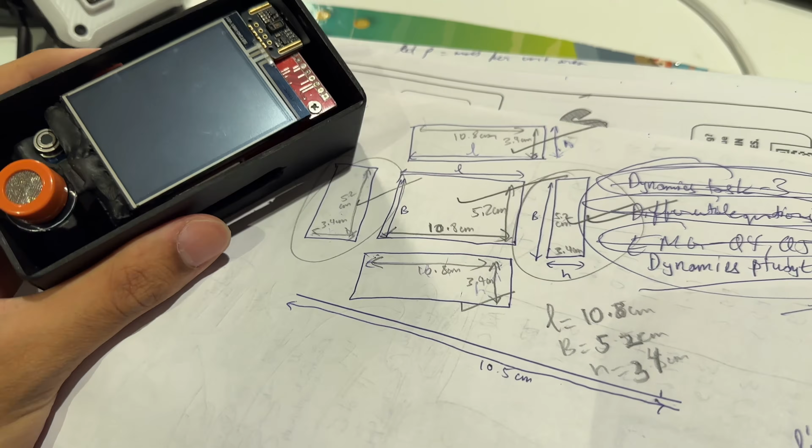In order to carry this out, I took into account how many sides I wanted to cover. I wanted the sides and the bottom side to be covered, so that's why it was 5 sides, 5 faces. Maybe sides is the wrong word, but you'll need 5 faces for your case, and that's how it will actually look.

Then you're probably going to mark up all the measurements, and then we'll move ahead with SolidWorks.

Obviously you're gonna need SolidWorks or any CAD software for designing your case, or any open source software. In my case, I'm using SolidWorks because it's free for me, given by the college. We're gonna go to the parts, and it's quite similar for most CAD softwares to design something, but let me just show you how I actually did it.

It's just basic sketching, and you'll probably go here. Now I'm going to fast forward the video a little bit, but I'll explain it in the middle, so just watch it.

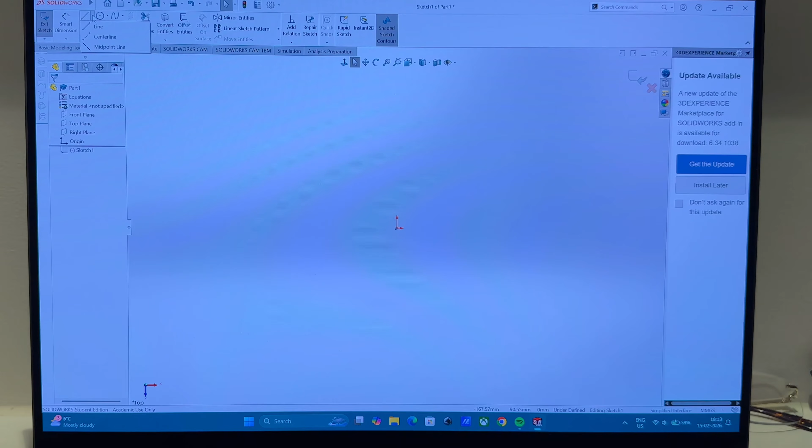First we'll start by actually making some shape. In my case, I made a rectangular shape, and this is how it turned out to be. We need to close the shape first, and then we're going to make the measurements pretty much clear.

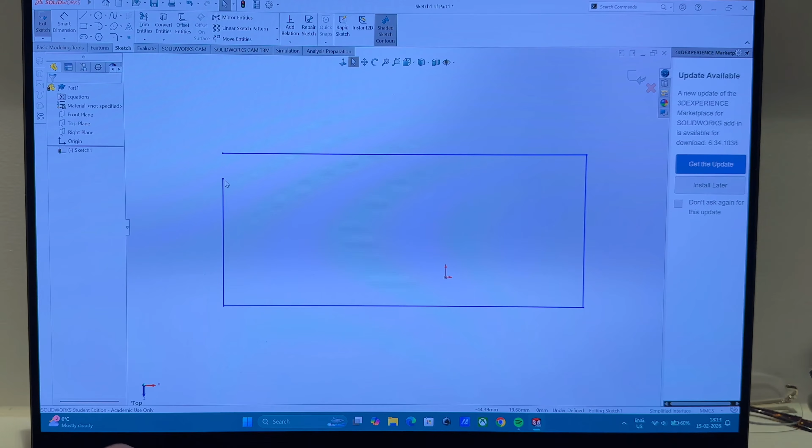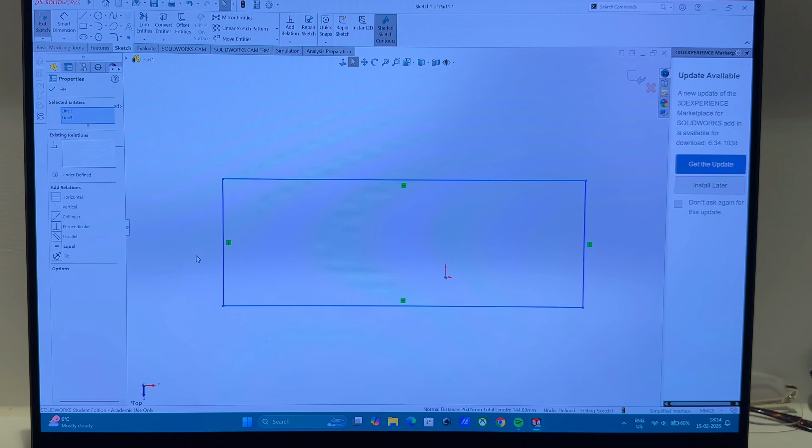So in order to actually design the case, there are many things that you need to learn in between. We need to add constraints to our shape so that it is actually going to close, and then we're going to do this, and this, and then it's kind of fixed.

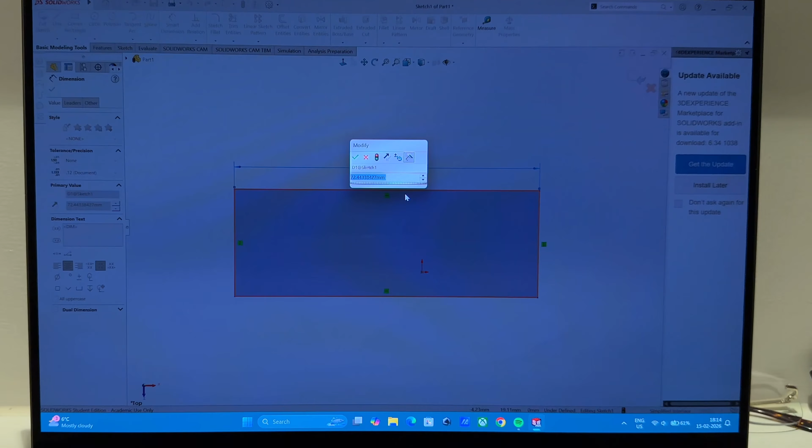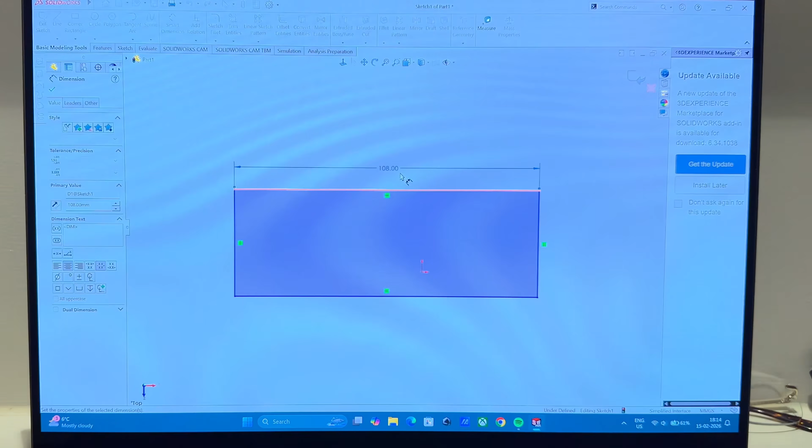So in order to get the right dimensions, we need to go on Smart Dimension, and this will ask you what is the length of the side that you actually need. In my case I needed 10.8 centimeters, which is 108 in millimeters. So this is 108, and then this is going to be 52, because I needed 5.2 centimeters.

This is the basic of what we are actually going to need, and then it's going to get a little complex, but you'll probably get it. You need a center line.

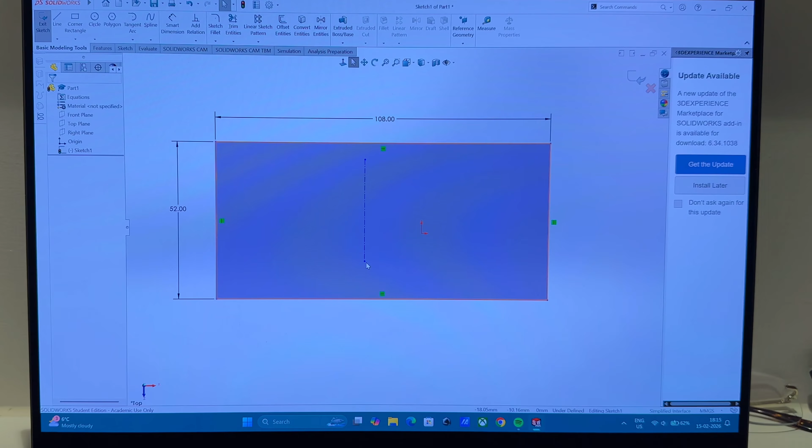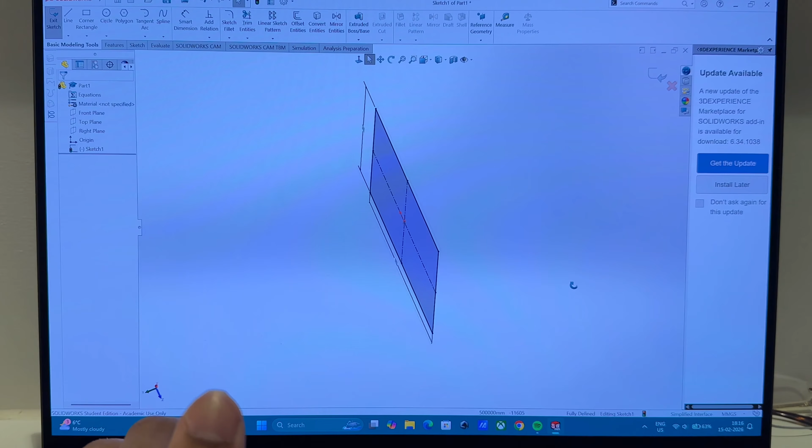Okay, so we are done with this part, making the bottom side or bottom face of the case, and this is how it actually looks. You are done with the first one, and you need to make 4 of it just like this. We are just going to do the final step, which is making it a layer.

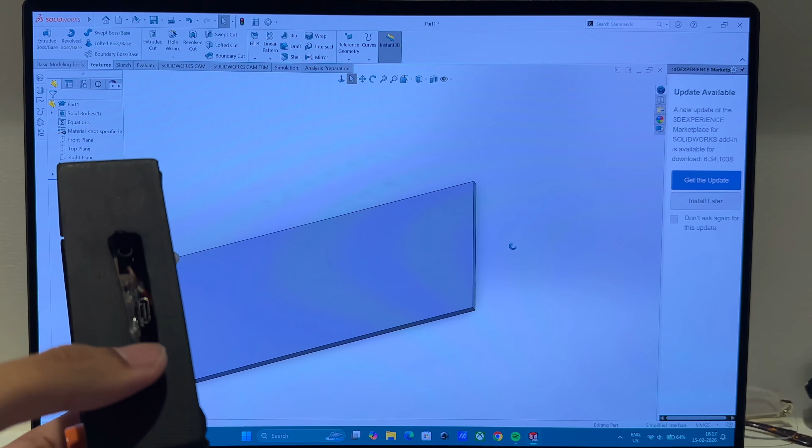Okay, so we got the first one, and it turns out to be the same as this one at the bottom. I have just carved a hole for the button, and you are going to actually 3D print it, and then we are done with the first one.

Make sure that your sketch should be actually fully defined. If it's not fully defined, it will probably show at the bottom, and if it's not fully defined, then you won't be able to print.

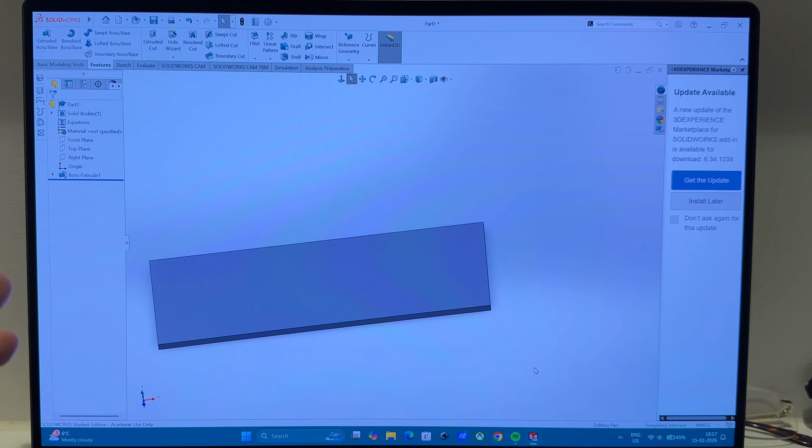Now for actually making this file into STL, that is the 3D printer file which we're gonna need for 3D printing it, we have to go here and save it, and just go through this and look for STL file, and save this as part 1 tutorial.

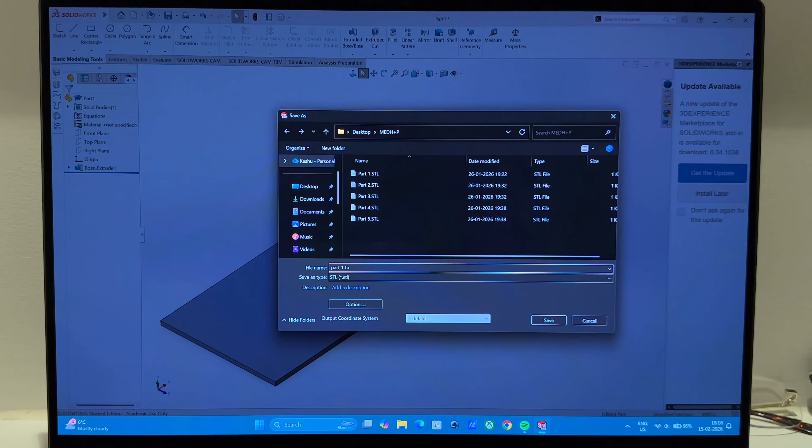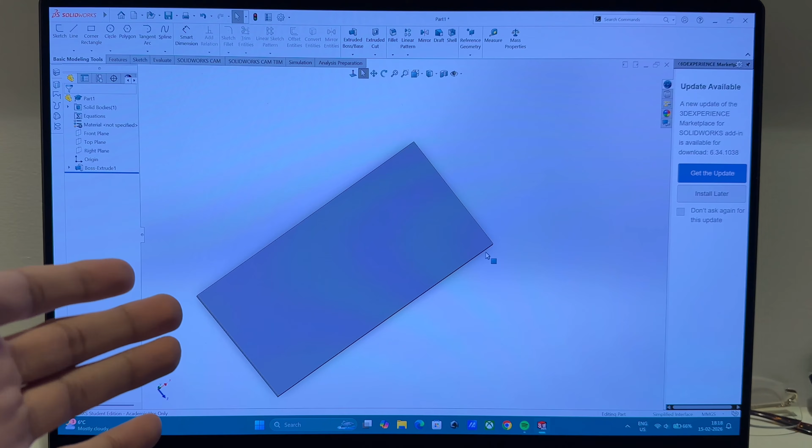Okay, so it's done, that's it. And now you're probably going to need the other 4 sides of the same thing we have done here. It's not a different thing, just make sure the dimensions are proper, and you just do the same process that I did.

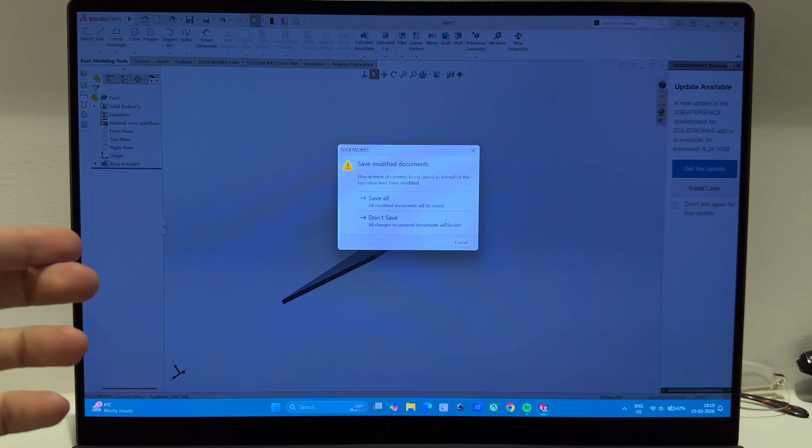Now we're probably going to close Solidworks. Okay, so now our Solidworks part is over, and congratulations, you made yourself a casing for it. And now let's make it real life. So we'll go to the 3D printing part now.

So we are done with designing the first part, and you'll probably going to need 4 of the parts just like this, and you'll be done with designing the first thing, which is doing the Solidworks job. Now our next thing is to go with the 3D printing.

Now we have the basic STL file, which is the file needed for 3D printing, and now we're probably going to need a 3D printer. Obviously I used my university's 3D printer. I don't have one, I don't have that much money right now to buy a 3D printer, but according to your use, you can use any 3D printer which is available. There are many 3D printers available for rent too, which can do your job.

But if you already have a 3D printer, you can convert the STL file to whatever file is needed for your 3D printer. At my home I had a 3D printer which was using G-code file, so I transferred my STL file to G-code file and then 3D printed that. So for my university, I just sent them the STL file and they printed it out.

So now I'm going to show you the next step, which is actually making the plate of the 3D printer and how it turns out to be on the 3D printer's plate.

For this, I'm using a reference of Anycubic slicer, which is again an open source software, but I had this software for my 3D printer which is at my home. I'm obviously not having that 3D printer right now here in the UK, but because I'm poor.

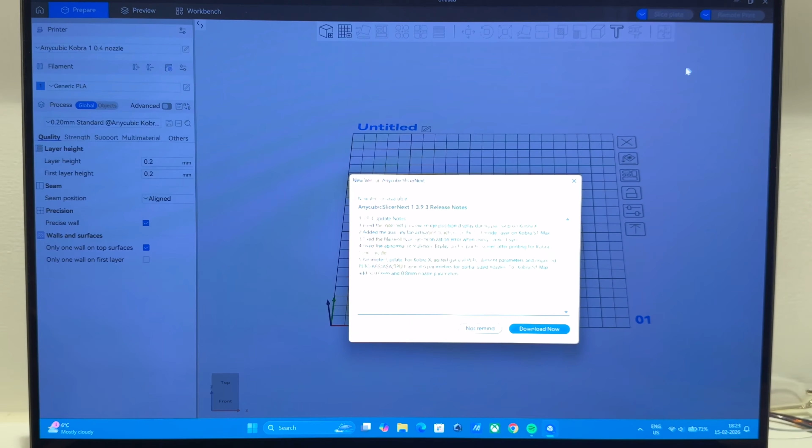And the next thing is to place all the STL parts from SolidWorks onto the 3D printer's plate. Now let's do that. We'll open Anycubic slicer, which opens a bit late because it takes time to load. This is how it actually looks. It's quite easy to operate all these softwares, though SolidWorks itself is just okay.

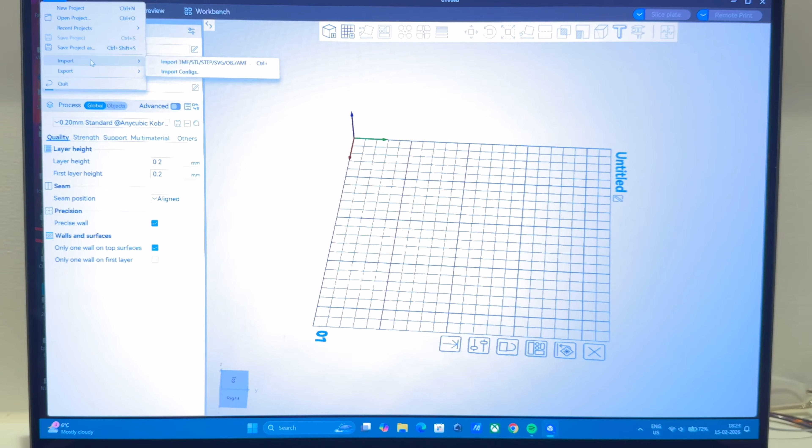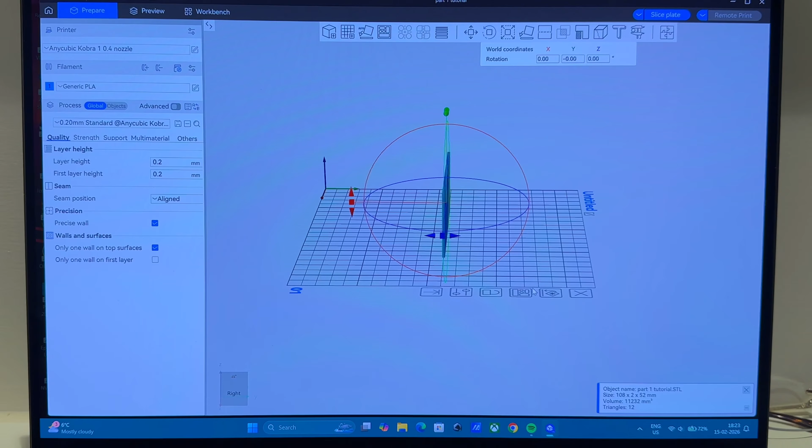We're going to go to import, then part 1 tutorial, and see how easily that gets imported. Now we want it to go horizontally, not vertically, so we'll change the rotation by 90 degrees. And that's it, it's done. That's how you place your part on the printer's plate, and you can duplicate or cut it as needed, but that's how I did it.

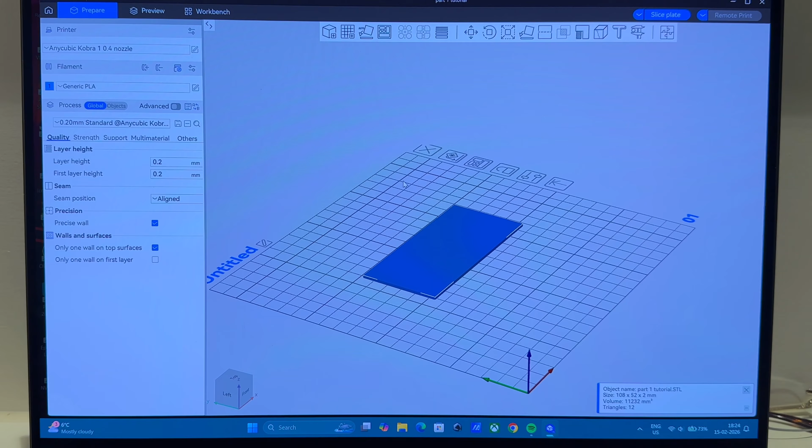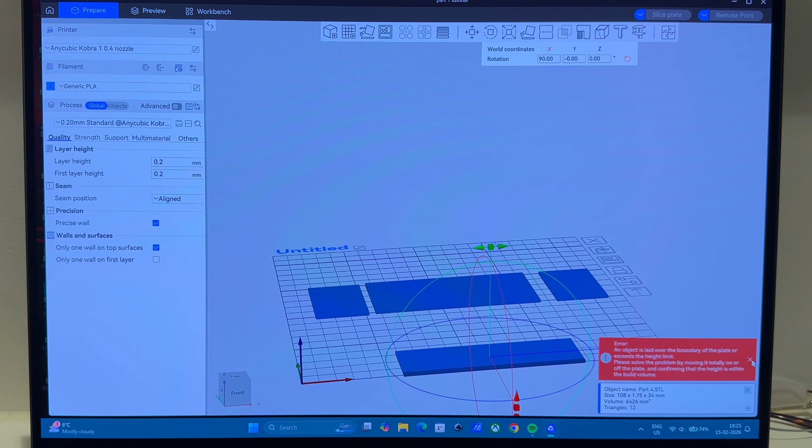Let's just import the other files too from what we actually designed. Okay, congratulations, it's done. From looking like this to this, it's actually done.

Next thing is to just 3D print it. That's probably going to take 2-3 hours, that's it. With just a little more speed, you can get it done in like 1.5 hours maybe.

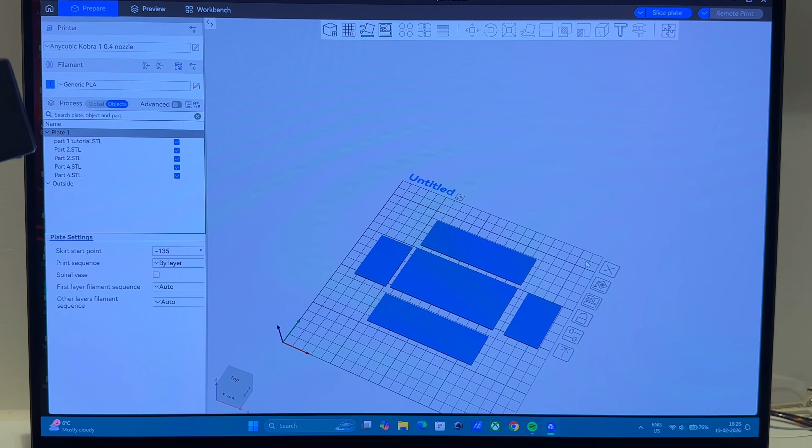And just paint it up, because my casing was white and I painted it black. For the next step, once you're done with 3D printing, you'll have all the parts you needed, and now just paint it up. I painted it black because black supremacy.

The final part is to cut out the buttons and space for the charging port and everything. What I did is measure it with a scale again. Before painting it, I used a scale and pencil to make sure the main body was actually fitting in with the case. I made markings and precisions so it fit properly, and that way I was able to get the right shape.